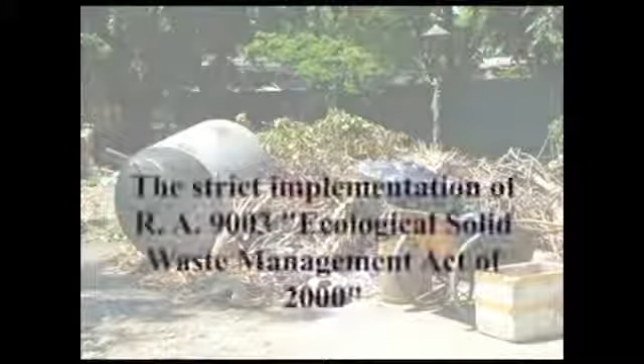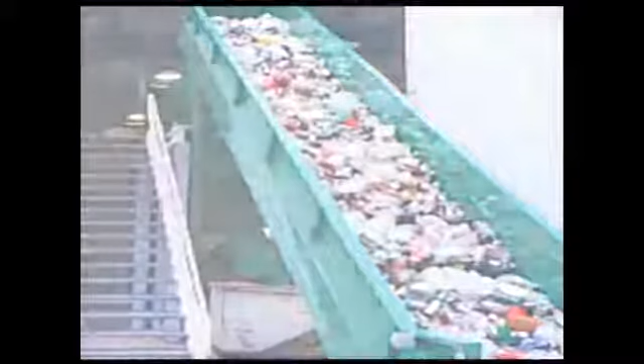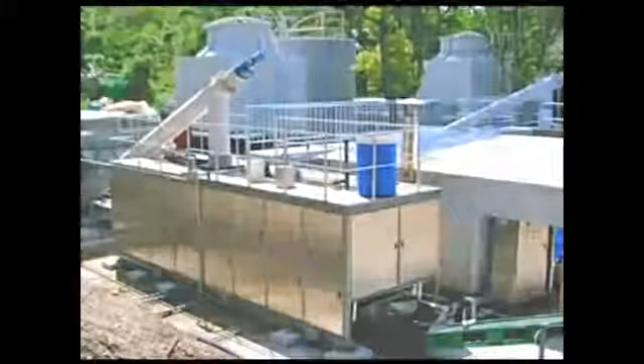Several solutions are available to remedy the given problem, one of which is the strict implementation of Republic Act 9003, otherwise known as the Ecological Solid Waste Management Act of 2000. Educating people on the proper disposal of home waste through public information, and for local government units, putting up material recovery facilities or MRFs would be very helpful. Lastly, the installation of environmental recycling system machines in these material recovery facilities or dump site locations will be beneficial in solving our waste problems.

The environmental recycling system is a machine that uses a low-pressure drying fermentation system that combines organic waste with local indigenous microorganisms and converts these wastes into fertilizers or animal feeds through a vacuum process, with temperatures at an average of 60 degrees where the microorganism is most active.

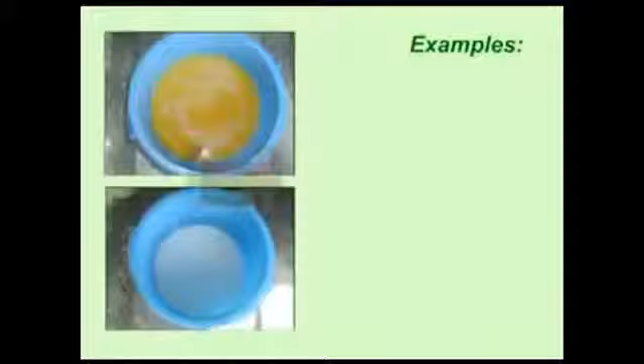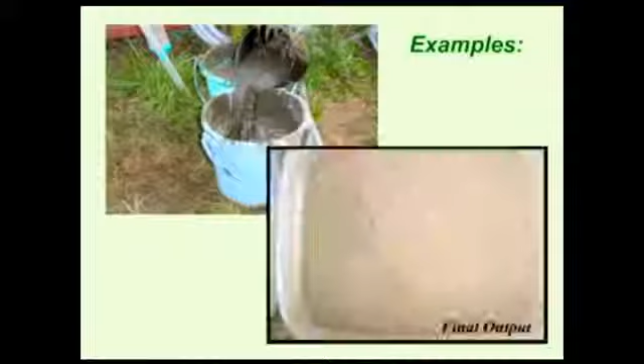The environmental recycling system can treat almost all types of organic wastes: leftover food and waste from homes, restaurants and hotels, carcass of pigs, chicken, rotten eggs, as well as animal dung from piggery, poultries and ranches, pig blood and slaughterhouse waste, expired juice, tea and milk waste, fish waste, and sludges from lakes and marshes, as well as sewage and septage sludge.

The ERS can practically process everything except for bones from pigs and cows, bottles, plastic and tins, which will remain in the holding tank. The output of the ERS, when used as fertilizers, has produced better results in agricultural products.

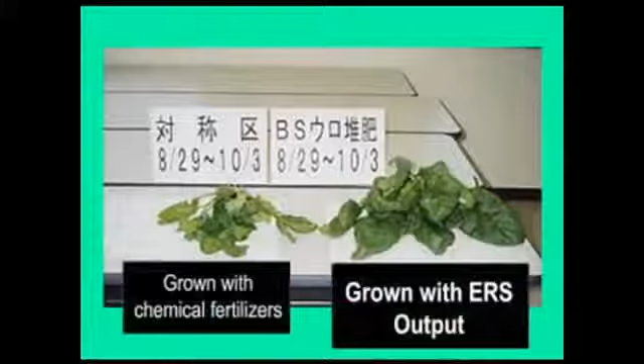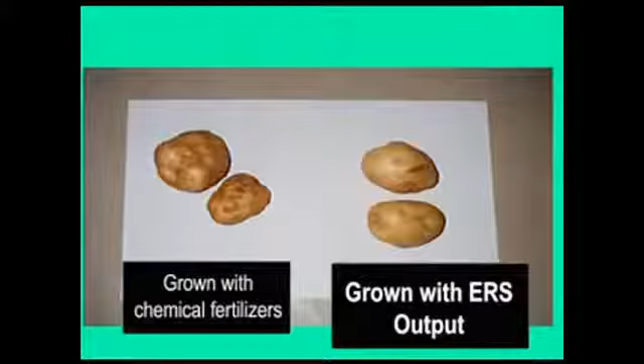The environmental recycling system is currently operational in several parts of Asia from way back 1995. Currently, there are over 180 units of the ERS operational in the People's Republic of China, South Korea, Japan, Malaysia, Singapore, and Indonesia. The environmental recycling system machine is a technical innovation from Japan, invented by Mr. Shinichi Shimose, who formulated the Shimose 1, Shimose 2, and Shimose 3 indigenous microorganisms from local host source.

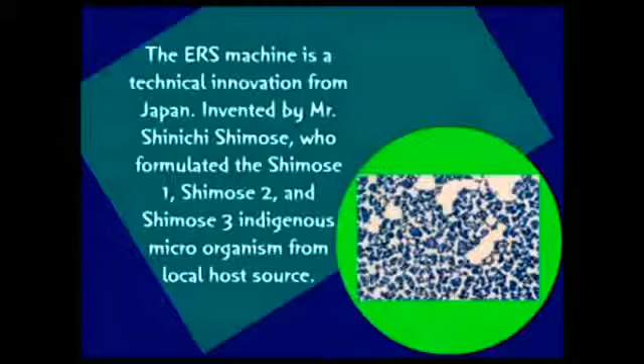The process begins with the collection of organic garbage. These are brought to the ERS plant, where it is sorted and checked for non-biodegradable materials. The contents are then combined with local microorganisms and poured into the machine.

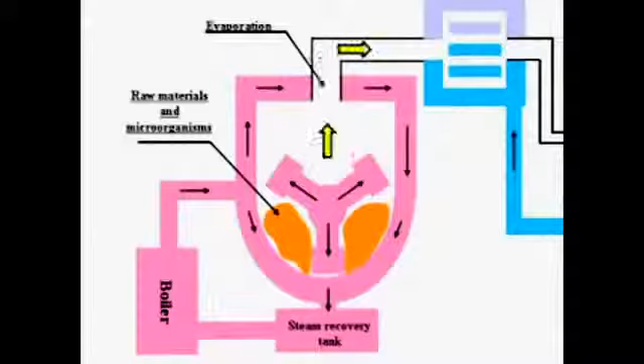Boiler steam will heat contents in the main body while the rotator rotates the waste materials. Raw materials will be treated and water will be evaporated and sucked by the vacuum pump, eliminating all toxic water from the garbage. This water will be sent to the cooling tower to be cooled.

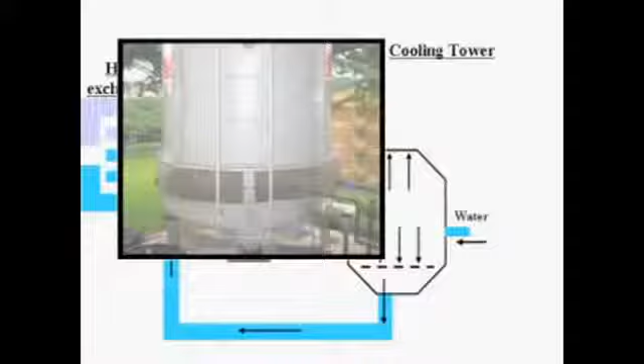The heat exchanger will draw cool water from the cooling tower to reduce the temperature of the saturated vapor. The saturated vapor is converted into cool water in the heat exchanger and flows into the scrubber, where dust and water will be separated. The output is then filtered to remove inconsistencies, and the resulting product may now be used.

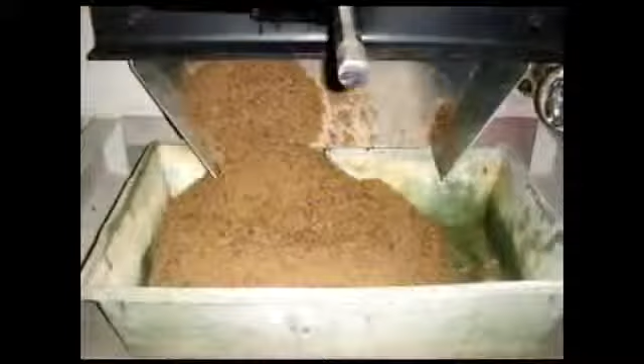The raw organic compost fertilizers are odorless with a moisture of 9.3%, which is dry, and are produced within 2 to 3 hours only. The environmental recycling system is powered by bunker fuel for its boiler and 220 volts electric current for the motors and control panel gadgets, as well as the conveyor.

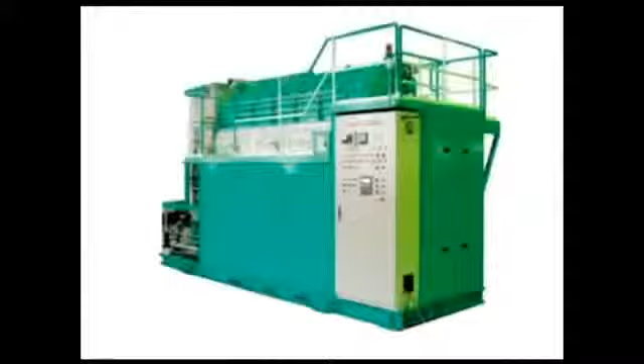The environmental recycling system is utilized in disposing waste materials in various industries such as piggeries, poultry, cattle ranch, slaughterhouses, frozen food processing plants, sugar mills, distilleries, lakes, marshes, and water dams, household, restaurant and hotel waste, and food and beverage factories.

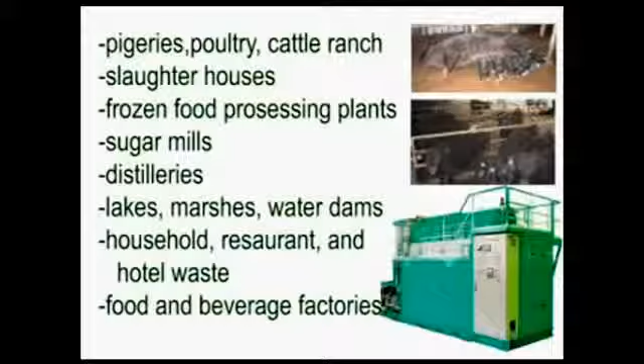The environmental recycling system features a small space requirement of about 180 square meters. For the ERS-1, it can be mounted on a truck for mobility. It can process various materials, it does not require adjusters, it is environment friendly, and it has a low maintenance cost.

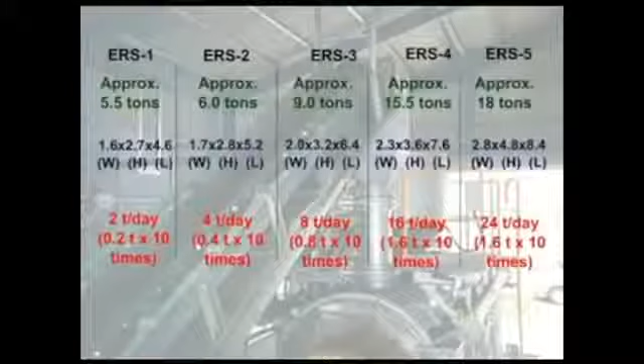The environmental recycling system is acknowledged by the Korean Natural Farming Association for South Korea, People's Republic of China, and Mongolia, the Japan Agriculture Association of Kagoshima, Japan, the Nanyang Technological University of Singapore, the Asian Productivity Organization, and the National Solid Waste Management Commission of the Republic of the Philippines.

The ERS is also qualified for the Clean Development Mechanism as agreed by the Kyoto Protocol, which can then be exchanged for carbon credits. Analysis from the Department of Science and Technology shows that the output of the environmental recycling system is bacteria-free.